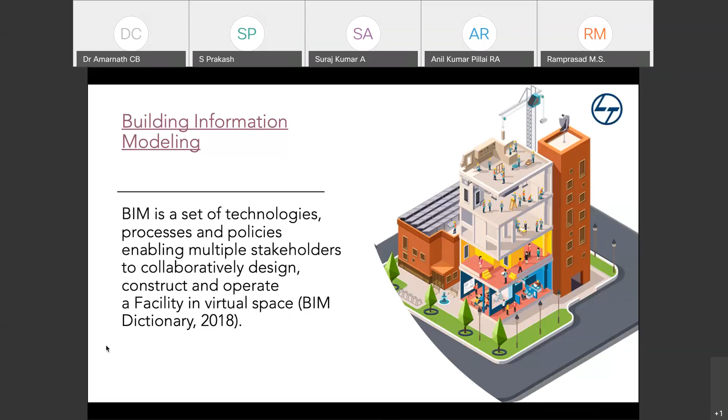So why BIM? We are saying that many countries are doing it. Obviously, they are doing it. They know the returns from that and what benefits different stakeholders can get. We in India, our AECO industry employs more than 35 million people and has the second highest inflow of foreign direct investments. It also contributes 11.1% of India's GDP. This is as per the survey of 2016. Okay, now there may be changes.

When you implement BIM in projects, it will firstly help you reduce the initial cost of construction and the life cycle cost. Because what is most important in projects is plan better and construct faster. But what happens in regular situations is plan faster and construct for a long time. So it may lead to delays.

When you have BIM kind of things, you have virtual models getting developed. You are doing a lot of simulations with respect to time planning, cost planning, different types of analysis, safety checks. Everything can be done so that you have a better understanding, even in terms of cost flow, what is required in the projects. It can also reduce the overall time by almost 50%, they say, but at least my understanding is 20 to 30% time can be easily saved when you plan it better and have visualization.

Like how you see in the aeronautical industry, mechanical industry, product development, they all develop the virtual model first. They do possible simulations before they manufacture or fabricate. I think this is most important for our AEC sector also. So that's the reason BIM comes into picture. BIM is nothing new. It's the same way how the aeronautic or other divisions follow. They have different terms used, but we use it as BIM.

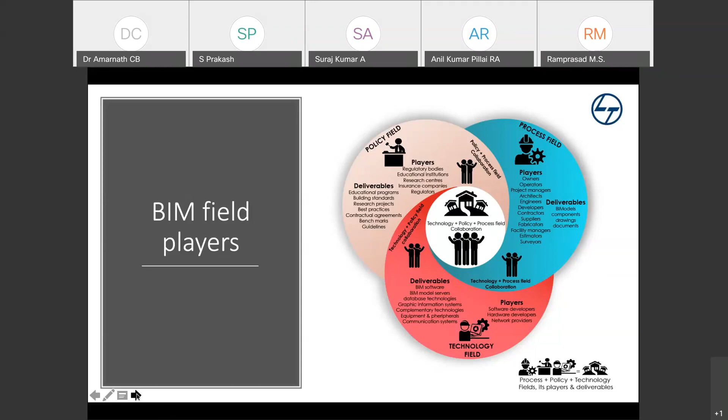Coming to our AECO organizations and their stakeholders - as I said, there are different organizations which come into picture when we are delivering a project. At least to name some of them, you have a design or engineering organization, a building organization, subcontractors, outside organizations, and owner organizations.

Within design, you may have architect, structure, plumbing, electrical, HVAC, or interiors people, and so on. Within the building organization, you have planning engineers, estimators, quantity surveyors, contractors, construction managers, and so on.

Subcontractors may include fabricators and manufacturers. Outside organizations are like government agencies.

I think you have to speak into your mic. Anyone here on the session? Can all of you mute your mics, please? I think all of them have unmuted their mics. Yeah.

Okay, thank you. So next is the owner organization - facility users, owners, or facility managers.

As I do this, I can still hear the voice in the background. Suraj, I think your mic is unmuted. Suraj? Yeah, I'm sorry, I'll mute it.

Thank you, thank you. So all of these people at the project level have something to do with BIM. It's not like the contractor says this is something the design team needs to do, or the owner says I have nothing to do, design has done it. It's not like that.

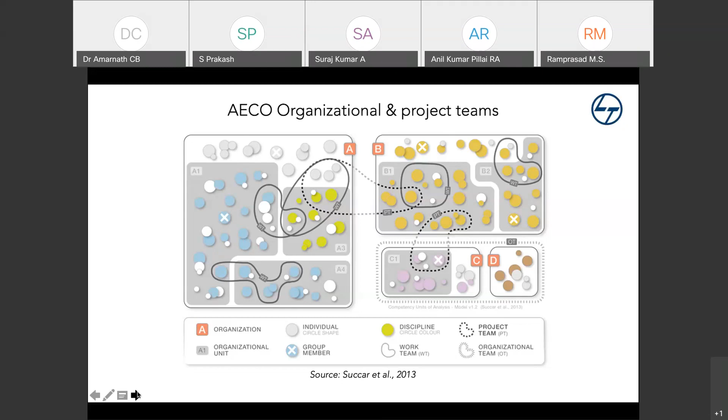The next one you would have heard is the term common data environment. The term itself says it's a common environment for data management. What data? It's facility data—it may be building, infrastructure, or city data. So where do you get this common data?

We call it a cloud platform. That doesn't mean it's just 'a cloud'—as you all know, there are cloud services provided by several agencies, including Amazon and so on, where dedicated servers and networks are set up, and you are able to use that space or capacity to do your activities, developing a model, using it, sharing it, or whatever.

So day in, day out, this cloud platform has become common for all of us. It may be Gmail or any email—that's cloud based, because you are not storing any data on your computer. Or it may be Dropbox or any kind of application these days, they're all cloud based.

The same way, cloud solutions are used for our AEC sector, where you can install this software, or software as a service can also be provided, where you can access the software, log in, and design the model, and other people can also open the same login and see the progress. During construction, any changes that happen can be updated back to the model in the same cloud, so other people get an update. Previously, in a traditional approach, it was a little difficult for people to coordinate, but here is a single platform where different people come together.

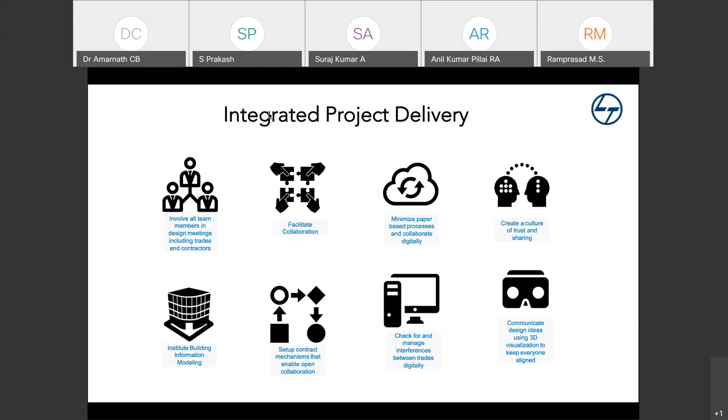So these are the 8 important characteristics for IPD.

Looking into the global trends in BIM, what's happening globally is that, as I said, more than 80 to 100 countries are working on BIM because of the kind of benefits it can bring in. BIM doesn't come in directly by itself; there is a set of researchers working globally from different research centers to mature these BIM technologies, policies, and standardized workflows. So a lot of research is happening.

If you want to go into detail and understand what's happening globally in terms of BIM, just go to Google and search BIM research — you'll find my article, published in 2016, which was one of the top 10 research outputs for 2016 on BIM globally. We researched what's happening in 70-plus countries by exploring research papers from 65 countries to get a better understanding.

Different countries have different research capabilities. Some countries, like the UK and the Nordic region and Scotland, are more focused on policies and development of BIM guidelines and so on. In fact, BIM standards have been developed nationally in almost 10 to 15 countries already, and ISO BIM guidelines have recently been launched as a series for implementation.

Some countries in the Nordic region or other regions are more focused on software development related to BIM. Most technology solution providers are from Nordic regions, the US, and similar areas. In the Gulf, countries are mainly focusing on implementing whatever technology and skilled people are available. They have good money, so they bring all these things onto one platform — they want to implement BIM, and they have good exploration on implementation.

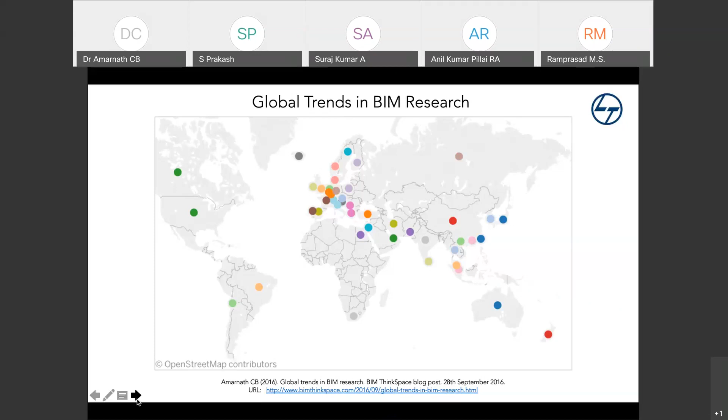So what's happening in the country now is many foreign companies pitch into the country. They take the projects by showing fancy things to the clients and the ministries, and then they subcontract it back to the Indian companies. This way it doesn't help. That's the reason we had a society to support and provide awareness on these things.

Next, about education. As we all know, BIM is not new in the market. BIM started already 3 decades ago. It has been seen as a new thing in the country, but it has been there in the market for the past 3 decades. Maybe this year it's almost complete, 3 decades.

So initially it started in some universities like Georgia Tech and Stanford. They initiated some interdisciplinary and distant collaborations. Then many universities realized that it's important, and they introduced it into their curriculums from 2003 to 2006 as a single course or intra-course collaborations.

Looking into this kind of progress, from 2006 to 2009 a number of colleges incorporated BIM into their existing curriculums. Meanwhile in India, universities are still thinking about introducing BIM in the curriculum. But one thing happening is they are introducing BIM software into the curriculum. Again, there are so many people with software capability, so teaching the same doesn't make sense.

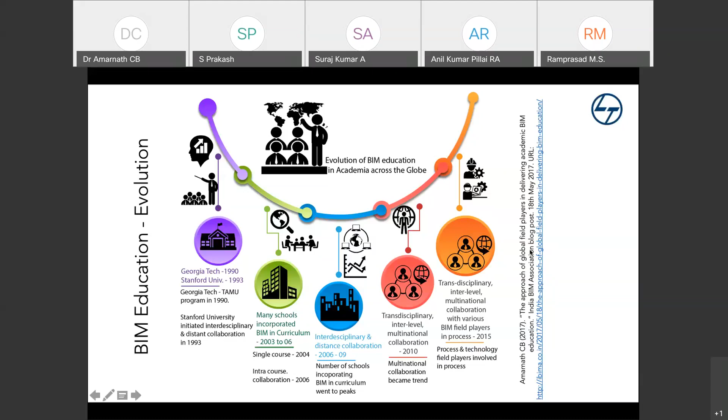This is the global trend in BIM education, where more than 20 to 25 countries already have BIM in the curriculum of civil, architecture, mechanical, construction management, real estate, and other divisions. In those curriculums it's already diffused, and they keep revising it every 1 year. But unfortunately in our country, the curriculum gets revised maybe once every 5 years, 3 years, 10 years, or maybe longer.

So then we will be very much outdated to work. It's one thing which is very important to consider: whatever education is delivered should help candidates focus on what's going to happen in the next decade. But our education system is helping them focus on what has happened in the previous decade. So there's a change required in the market on these lines also.

So, BIM adoption efforts worldwide from the public sector. This is about the mandates, since ministries and clients realize that BIM is benefiting them because they're able to visualize what's going to happen. They get clarity in terms of costing, clarity on how the building is built and managed, and they get better data for smart facility management during operation, where they can save a lot of money.

The main thing which matters is, after 10 years of facility construction, if you don't get the right data, how do you deal with it? When you have BIM, you have all the data set on one platform, so you'll be able to monitor the facilities easily. You don't need to hire more people to manage the facility, but you need a good platform set to manage the data.

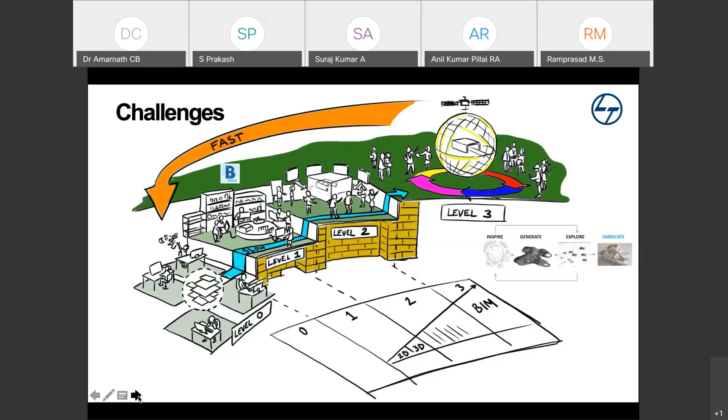Next, when it comes to BIM standards and guidelines, there are different ones. Initially, when BIM started in the 1990s and then 2000 onwards, some national standards began. That was a situation where a lot of national standards developed - every country wanted to have its own standards for BIM implementation. That's how USA has some agencies with their own standards, along with UK, Singapore, Finland, Australia, Brazil, Norway, Spain, Taiwan, Hong Kong, China, New Zealand, and many more countries.

In fact, these are all national standards which are more required for level 2 implementation. For level 3, you need ISO, which is a global standard. Unfortunately, for level 2, we don't have national standards.

What happens with the Indian market is we combine different standards from other countries and make a mixture, so we don't understand what's happening, and then we use those standards.

I want to add two more: 19650-3 and 5, recently launched, this month and the previous month. And there are a few others based on different implementation requirements. These are some ISO guidelines for BIM under development that may be launched soon, maybe this year or next. As I said, level 3 BIM standards needs another 3-4 years to be developed.

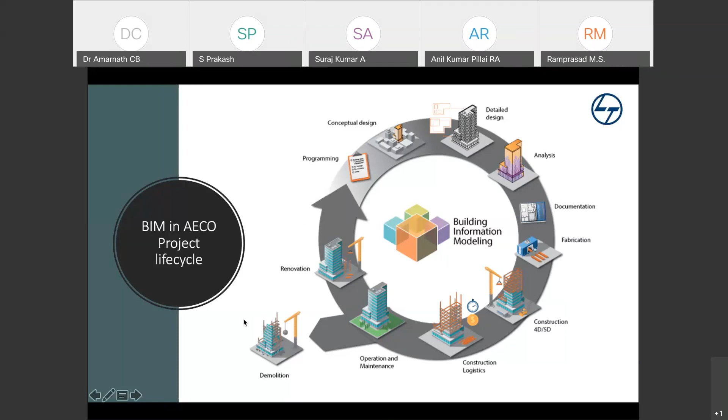The client may say they need site analysis done with BIM, or a BIM model developed with the process, 2D documentation generated from the model, fabrication done with the model, or use it for time planning. The client needs to make a decision sitting with a consultant, saying these are the BIM uses I want to implement for my project. Based on that, further RFPs will be prepared, and then the project execution plan can be prepared based on that requirement.

When someone asks me what is the cost involved in implementation of BIM in a project, well, it all depends on what level of BIM you need in the project, what benefits you want to implement or take return on investment on, what is the size of the project, what technologies are involved, and what kind of people to be procured. Everything counts if you want to decide the cost of BIM implementation. It's not something a guesswork.

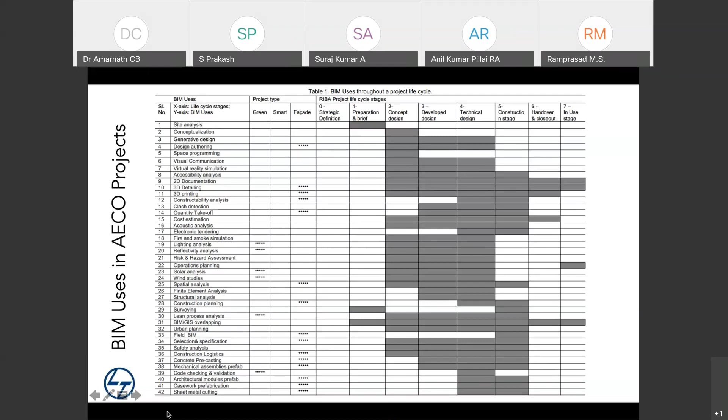Here you can see 42 menu items, and in the next screen you can see 43 to 74. That means if you want to implement BIM in a project, you need to select which of these items to activate. For any item activated, you may need some set of softwares, a set of people to work on that, and a set of deliverables coming out of that. All the uses may not be applicable for all types of projects.

Coming to BIM model details. When we say BIM model, we all know it's good for visualization. But how detailed is this model? Will you get the detailed model from day one of design? It keeps on maturing. If you can see here, different color codes in the columns: strategic definition, preparation, concept, develop, technical, construction, handover, and maintenance. So the BIM model also matures based on the stages of the project.

We call it level of detail or level of development, LOD. Initially, strategic definition is more of a client and consultant discussion about what he needs and what can be delivered. Preparation brief is where they start doing the site data check and updates, where site data becomes available. This is called LOD 100, where you have a planning model with site data available, which may include pipelines, underground network, surrounding utilities, and surrounding facilities.

Concept design is where you start making a conceptual model of your facility, which may include orientation, shape, and basic information. This is also LOD 100. Then comes developed design, building on the concept design where mainly architecture comes in, along with structure team and other people, who add further data into the model, like number of floors, number of spaces available, and what each space will be utilized for.

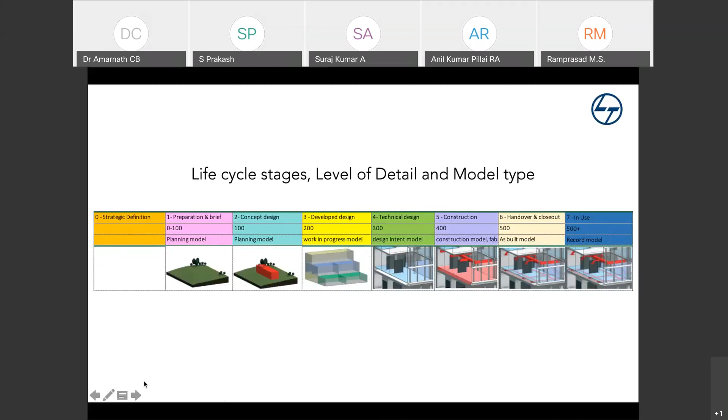When I talk about different hotel menu items, as I said, different dishes - each of these BIM uses, 74 items, has been categorized into different life cycle phases, and we have 8 categories for that. I won't go deeper into that because we have very limited time, another half an hour, but I will give you an overview. Like if you go to a hotel, you know the menu items - South Indian means you have idli, vada, dosa, different items like this. The same way in our BIM menu, you'll have different items. You may need to select which one you need, and based on each selection, you will know what is the kind of cost incurred for that implementation in the project.

So the first one is existing condition modeling. When I say existing condition modeling, it's nothing but collecting data from the site, any site related data, any existing facility already there that you want to renovate - that data can be captured.

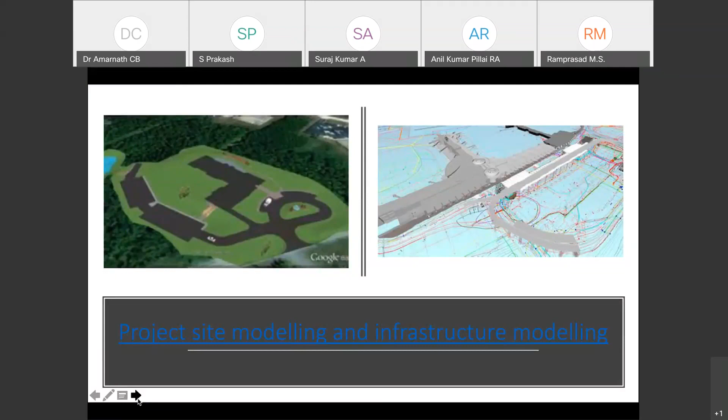That data can be captured with existing technologies and equipment. Next, within that you will be collecting the ground surface model of the project. You'll be developing the ground surface model and any occupying or relevant structures and utilities affecting the project. You will have a surveying and BIM team involved, and you may be using drones, laser scanners, robotic stations, photogrammetry, these kind of things. And you'll develop a BIM model with LOD 200 to 300. This happens in the initial stage of the projects, and you may be using softwares like Revit, Bentley, Context Capture, Recap, SketchUp, these kind of things.

The next one is surrounding site modeling. Now you collected the site data, and now you want to collect the surrounding site data, surrounding that site. Maybe what kind of infrastructures are available, facilities available surrounding that, what kind of roadways available, what kind of public transport available. All this data can be captured. We call it more of urban level data capture.

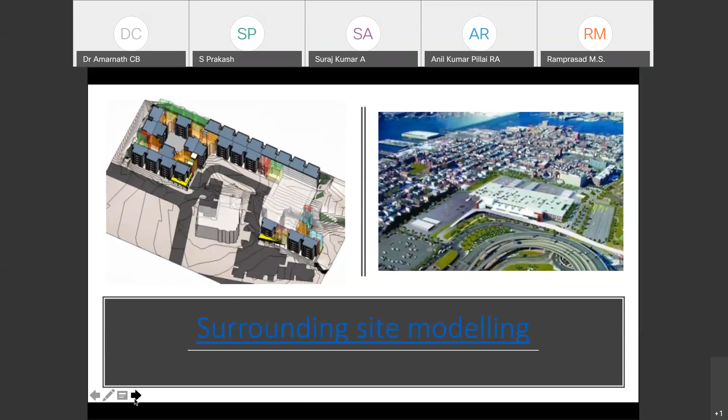For better planning, this includes area, buildings, and infrastructure adjacent to the project site necessary for project analysis, review, and decision support. You have the same surveying, design, and BIM team using drones and laser scanners, and LOD 100 to 200 is required. You will have similar some kind of softwares mentioned here, you can see the Revit, context capture, and so on.

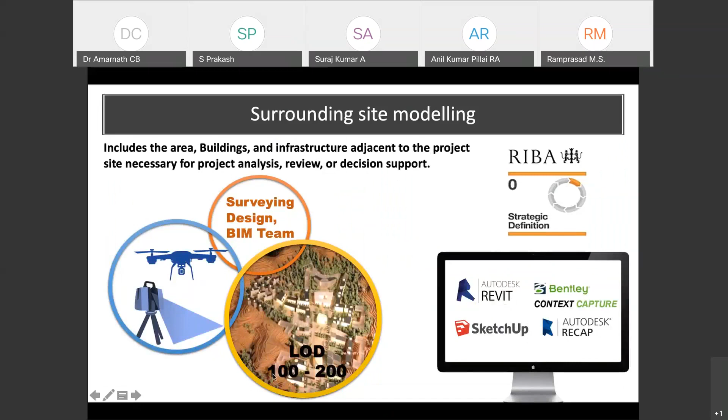Next one is existing condition laser scanning. For example, there is some existing facility you want to renovate, or you want to add on some other new facility to that, but you want to do retrofit also maybe. Then you will use laser scanners. You will capture the point clouds from that, and then you will convert the model. This will also allow you to find what are the defects that need to be fixed, and so on. So here you may be using 3D laser scanning that produces dimension-accurate and detailed 3D point clouds for existing facilities and assets. You have surveying, design, and BIM team, and similar kind of software is available for doing this activity.

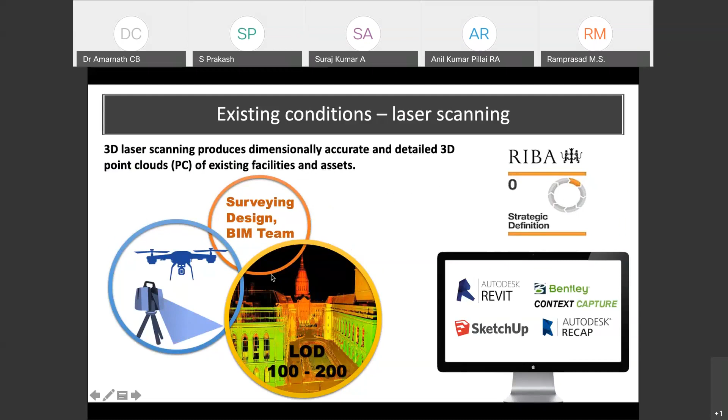Next, existing conditions interior modeling. Most of the infrastructure projects or anything, we have interior arrangements, no? Maybe seating arrangements or interior design that may be changed every 5 years or 3 years or 10 years once in many of the IT companies. But how do you change? Before you show to a client, this is how it looks like before, and this is how it looks like later. It will be very difficult to define that without having a clarity. So what you do is, it will be very difficult to take the measurements within the facility. You go into the facility interiors, go take the measurements. That's a very tedious process.

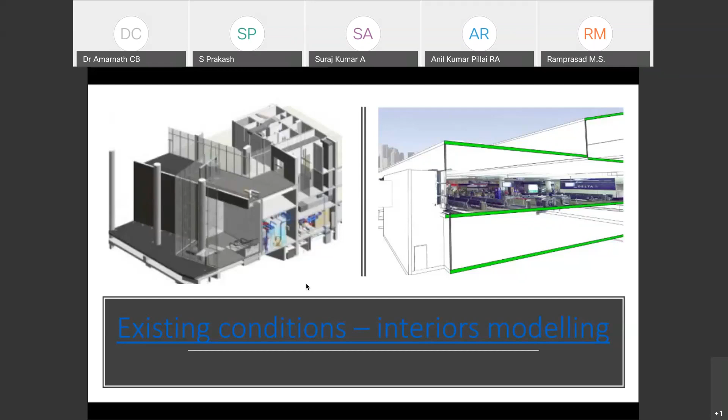But you have laser scanners wherein you can walk inside the facility, and it collects the point clouds. You can use the same point cloud for easy measurements, and you can also get a clear understanding on what kind of interiors are there. Then you can reconsider the new design and you can showcase to the client for better planning. So here a spatially accurate model of existing spaces, building systems, components, and equipment will be collected with an LOD 300. You can have a better walkthrough of the facility. You can do better surveying, design, and BIM team will be involved here, and some set of softwares mentioned here will be utilized.

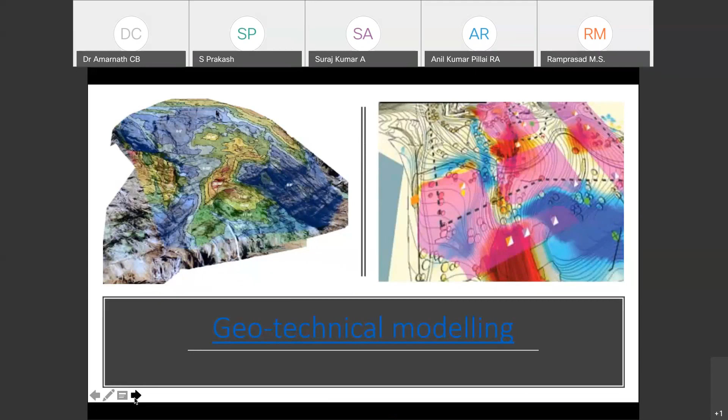So this is for geotechnical modeling. Whoever is geotechnical related people, you also have a role in field. You can collect the geotechnical data from the BIM process, and it will help you for better visualize dimensionally accurate models of geotechnical analysis. Reports can be generated, which may be required for the project scope and so on. So here LOD 100 to 200 can be generated. You have a geotechnical surveying and BIM team involved, and you may be using softwares like Civil 3D, Recap, Context Capture, Revit, and so on. This all happens in the initial stage of the projects, level 0.

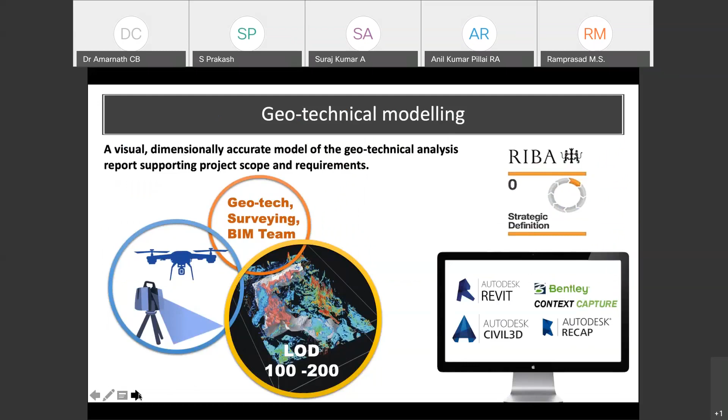You have surveying, design, and BIM teams coming into the picture. Softwares like Navisworks, Recap, Context Capture, and Revit can be utilized. So that's the first category of menu.

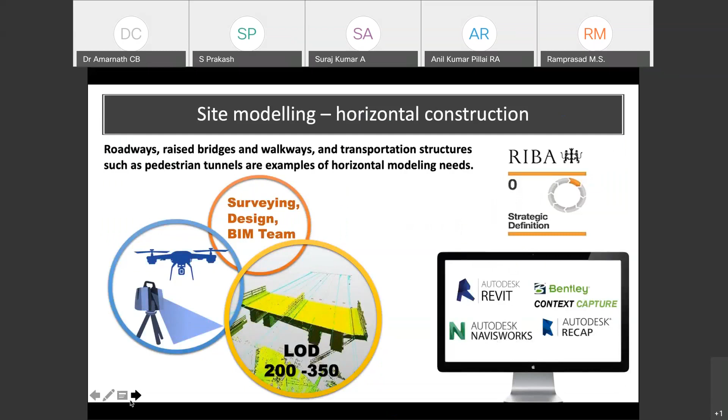Okay, this is the second category. Once you have the data of your facility of the project site, next what you do is you want to plan your facility. So you need to develop the model that we call the design and building system model.

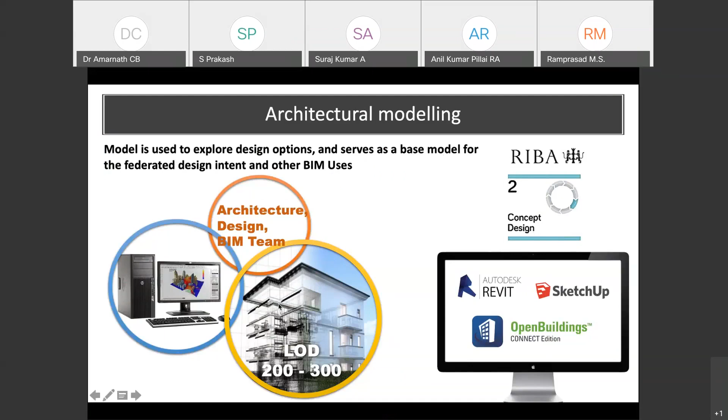There are plenty of softwares. Next is space, accessibility, and circulation requirements modeling. When you have a particular facility, you want to know which spaces should come in which locations. You need to do better planning for that, so BIM software solutions also benefit you there - modeling of space, circulation areas, accessibility usage, and accessibility standards, because some spaces may be publicly accessible while some may be restricted.

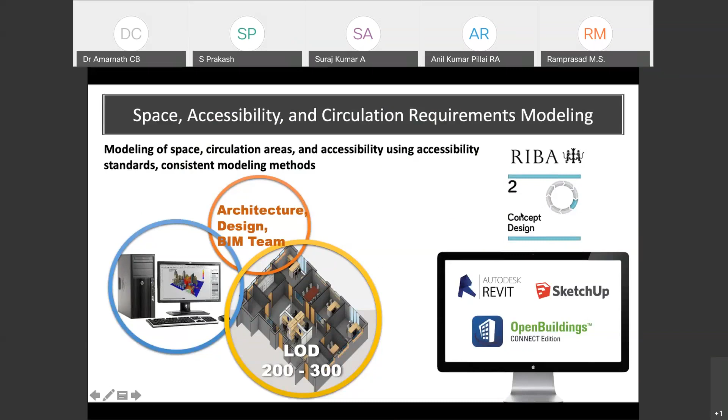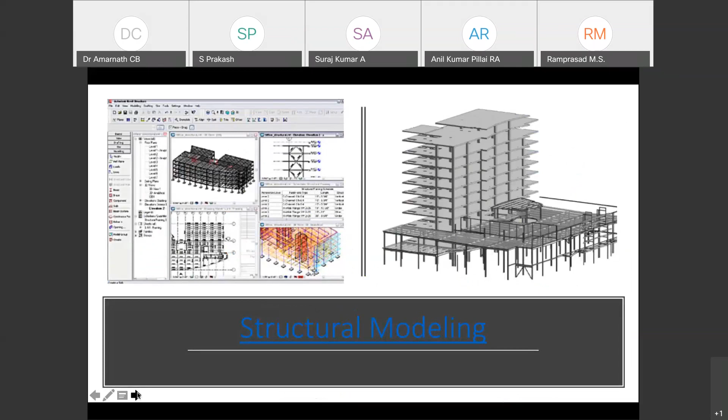So this also happens during the concept design phase. Then the structural modeling - this is where the structural engineers come into picture. Once they have the architecture model, the structural team also works on developing the structural BIM model using these BIM software solutions. So the design team, structural team, and BIM team will be involved.

The next one is heating, ventilation, and air conditioning, which is more of a mechanical analysis system. Trust me, BIM plays a very major role in this. Can you imagine a facility of this category being built without models, with fabrication done as per measurements? It becomes very tedious, because first of all, to fabricate you need exact measurements. Second, if you have BIM models, you can directly link with CNC machines and develop fabrications very quickly, with minimal human interference.

Assembling also becomes much easier because you can plan: these are the items I need for the site on this day. You can procure that on site whenever required, rather than bringing everything and dumping it on the site at once. So this helps MEP people in a big way.

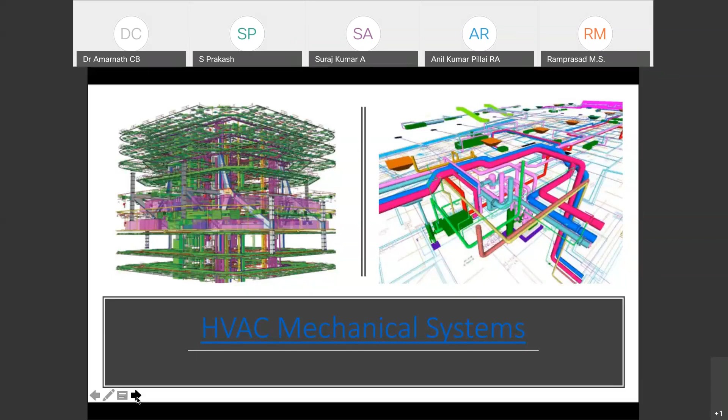So a model of the MEP system is developed for decision support and analysis, made ready for detailing and fabrication. When it comes to heating, ventilation, and air conditioning, you have several items coming in, and you may need to do a lot of coordination work. Use softwares like Solibri, Navisworks, and so on. This happens during developed design, and the BIM model will be a little more detailed here, LOD 200 to 400, because you need to send it for fabrication.

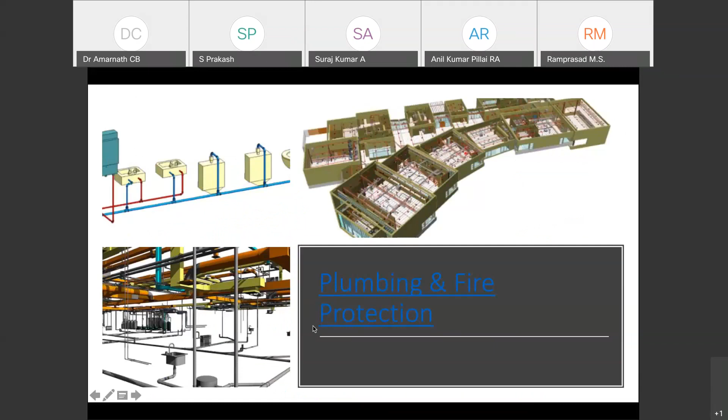You can also go for the structural team, LOD 350, for fabrication. Next is plumbing and fire protection - these models can also be generated and procured easily. You have a MEP team, facility maintenance team, and BIM team involved. The detail level here is much larger, 200 to 500, until handover, whatever changes happen. Because when it comes to plumbing and fire protection, this is the most important thing the maintenance team utilizes during the operation phase. So whatever has been developed, designed, installed, and whatever changes occurred during installation, everything needs to be updated back into the model when delivering it to the maintenance team.

Next is electrical alarm systems. You can also model the electrical alarm systems, developing the primary components of electrical lighting alarm systems, building automation systems, controls, and so on. Here at LOD 200 to 300, you have the MEP, BIM team, and facility maintenance team coming in, and this happens during the developed design phase.

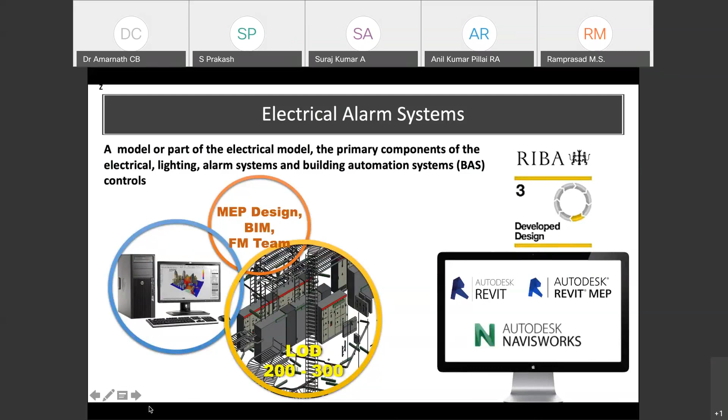Then the interiors. Interiors are not left behind; they are very much easy to use with this model. They can easily look into the models and have walkthroughs. The client can get impressed very easily because you can make them walk through using virtual reality, augmented reality, and all these things, giving a better experience to the client and other agencies.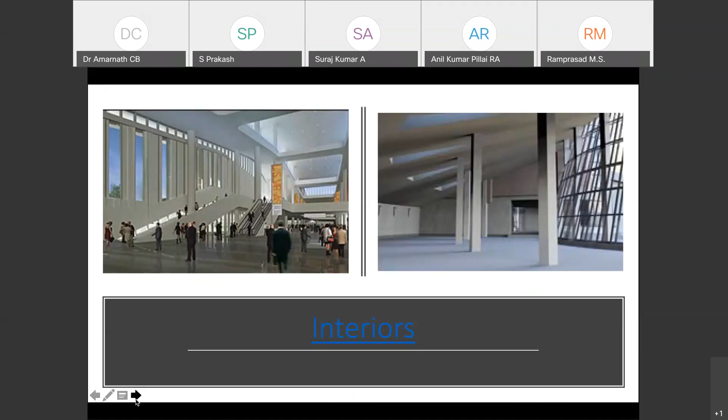This is where modeling of interior design options, material finish systems, signage, and daylighting happens. You may use software like Revit, 3ds Max, SketchUp, and Lumion for better visualization.

So tenant build out is when you have big facilities, and for your tenants you also need to fix the interiors. For example, imagine an airport with different shopping complexes, like a McDonald's or Coffee Day. Obviously those people cannot come after you start the airport and then do the interiors; everything needs to be planned prior.

You need to know who is going to take this facility, and you need to also get the interiors done for them before delivering the project. That's nothing but tenant build out. All these things should be considered, and at the time you're delivering the project, A to Z will be delivered.

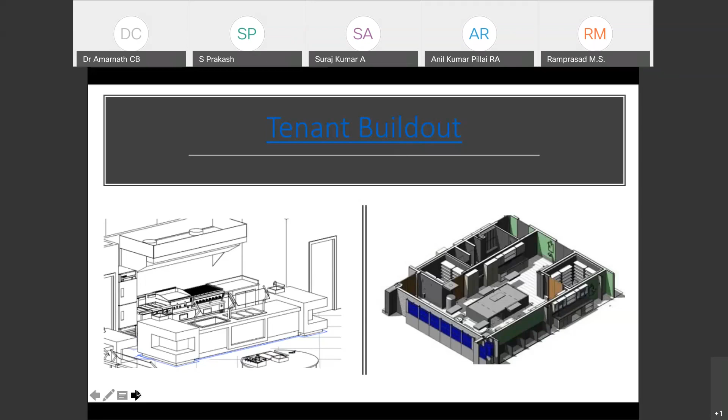The next category, the third menu, is about once you develop the model. First you collected the project data and site data, next you developed the model related to different disciplines, and next you use the model for different types of analysis and reporting.

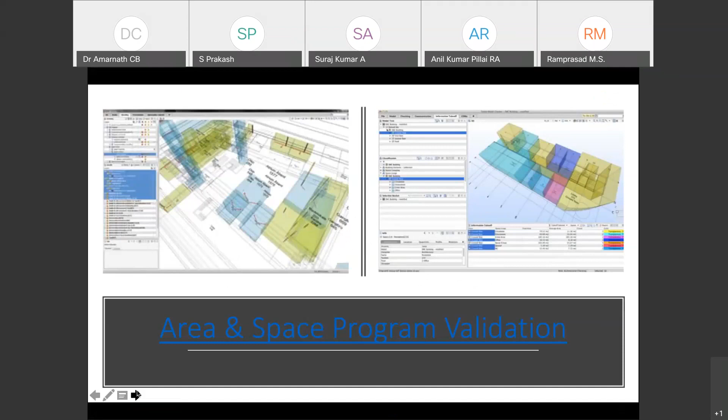So you can use it for area and space program validations, because you need to know how much space is required for each space, and the area and everything needs to be validated.

You can use the BIM file, specifically spaces and bounding elements including floors and stories, analyzed with model checking software. One good one is Solibri, which will help you well in doing these coordination checks.

The next is design options. When your client is there, you cannot show one design and say go with it; obviously they will expect you to show 2 to 3 alternative design options. With the BIM model, you can plan different possible alternative options at a conceptual level, then show the benefits and drawbacks of each design so the client can make a quicker decision on implementing.

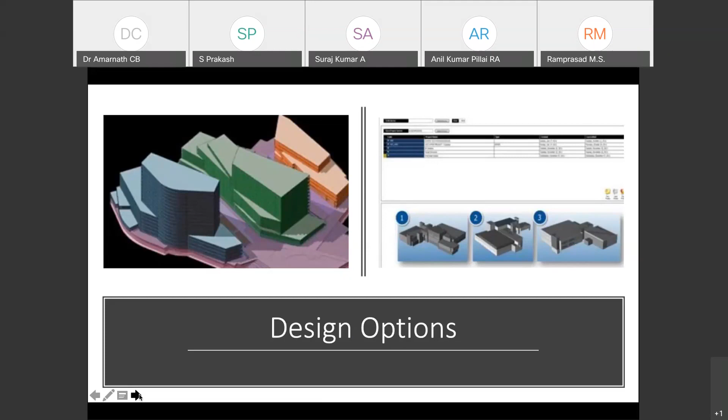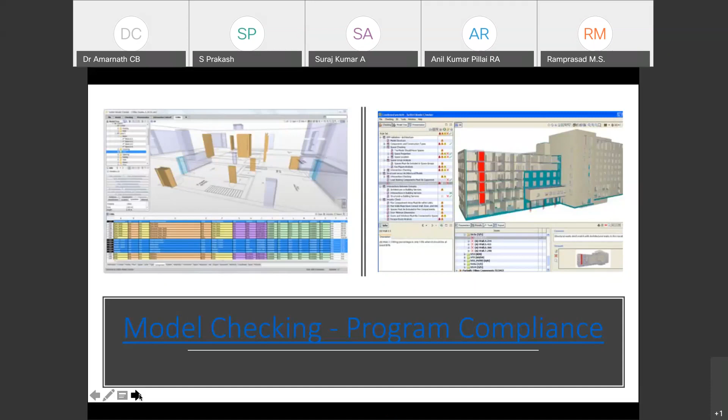The next one is model checking for program compliance. This is a very important BIM use in the project. When you develop BIM models or CAD drawings, if you go to the site and start implementing and there is any overlap between different disciplines, rework occurs. But when you have the BIM models, you can bring them all together and do interference checks, avoiding these clashes before going to the site, saving a lot of money and time, improving quality, and making the client much more satisfied.

So model checking is a rule-based activity that automates model reviews. Whatever software you use, like Solibri, you can set rule sets saying this is the minimum distance between these two items and this is the space required. Every rule set can be set and it will identify and flag the clashes. Then you can have a coordination meeting with people from different disciplines and resolve them. This happens during developed design, technical design, and also during the construction phase. That's nothing but clash avoidance and detection.

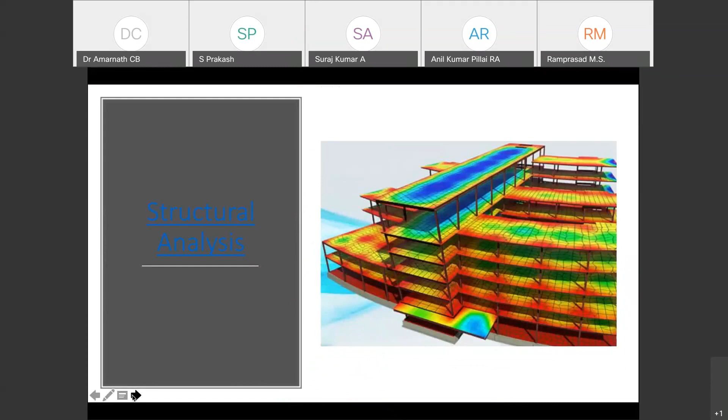So next one is structural analysis. Previously you saw structural modeling; now once you have the model of a structure, you can do different types of analysis. Previously you used to use STAAD and similar tools, which are all 2D based. Now you have structural analysis software for BIM itself - you just use the model and can do better structural analysis with detailed information. The only thing is, all the previous software you used in the 2D era gets outdated, and you cannot use that kind of technology alongside this implementation.

You cannot say some people use the model and some people go with 2D - that's no use at all. Better not implement BIM in that situation. If you want to go with BIM, go with complete BIM so you get the return on investment. If you want to go with half BIM, better don't go with it at all. Whenever you feel ready to go, then you can start that.

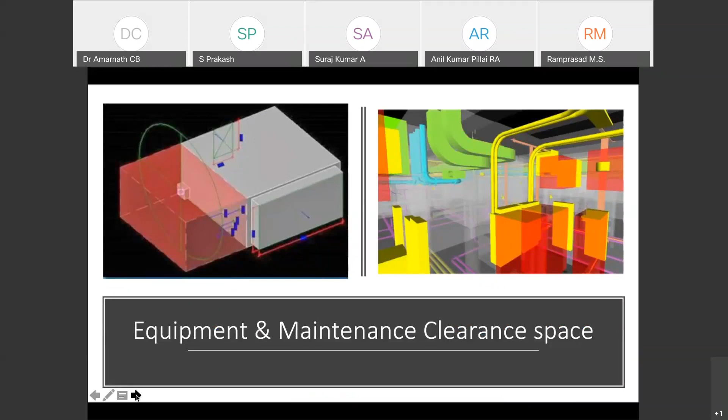BIM can also help you find equipment and maintenance clearance space - whatever space you need around each equipment as clearance for its operation - and that can also be checked well in the BIM models. So the modeling covers major equipment and elements required, and defines access and maintenance spaces. Here, LOD 400 will be required, and you may use software like the Revit Suite and other applications including Navisworks.

Previously, to do estimation we used to imagine the quantities and put a rough estimate. That used to deviate a lot from what was actually delivered, and the client would become very unhappy when comparing the planned budget with the actual cost.

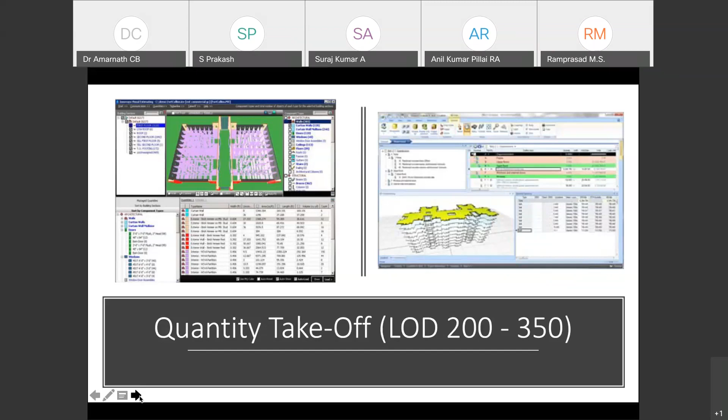But when it comes to BIM, you have the model with all the materials exactly defined. It's simple: you extract the quantities from the model and multiply with the existing schedule of rates. Your planned cost will not deviate more than 5%, so the client is happy, fund flow is smoother, and there are fewer litigations. Once the BIM model is available, you can extract quantities easily and very fast.

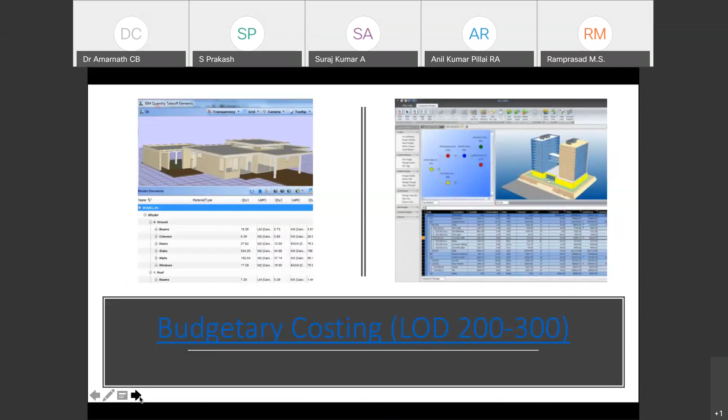With the same quantities, you can do cost estimations easily. Every time there's a design change, it used to be tedious to redo the cost estimation, but with the BIM model it's very simple. Whatever changes happen, you update the model, extract the quantities again, and multiply with the schedule of rates. Within a day or two, you get the quantities and estimations. It's used for budgetary costing.

The next category is about sustainability, LEED, and energy. Many times we speak about smart and sustainable cities, green buildings, and green infrastructure, going with LEED, IGBC, TERI, GRIHA, or other certifications. Those related benefits are also available in BIM.

Once you have the BIM model, you can use it for energy modeling, sun studies, and daylighting analysis. The BIM model is analyzed to improve daylighting in design, understand sun shading needs, and balance daylighting with artificial lighting. There are softwares like Green Building Studio, EcoTect, and so on.

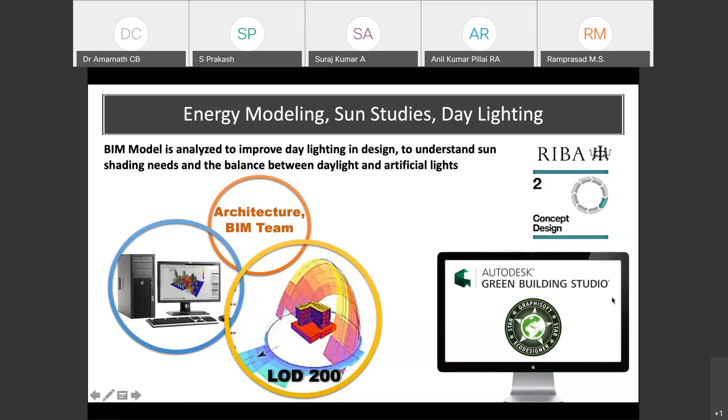The next one is existing building rapid energy modeling. Even when you don't have enough data for your facility, you can still do energy analysis. There are techniques and software solutions that help, like Sefaira, Revit, and so on, allowing you to do energy analysis with limited data.

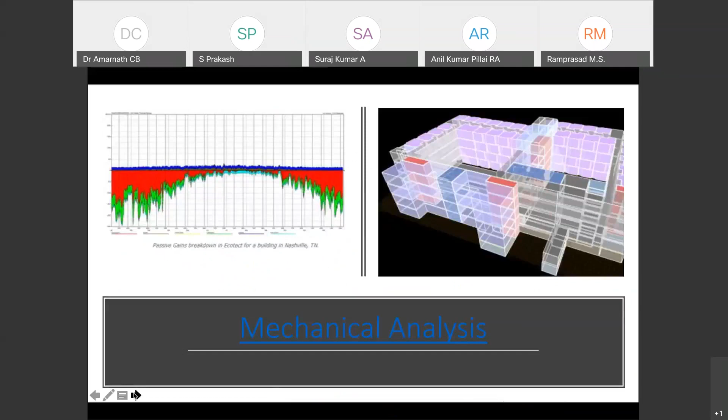Next is mechanical analysis. You can do virtual testing and balancing of the design model to support sustainable building system design analysis, calculate native heating and cooling analysis, and so on. Here the BIM model will be like LOD 300, with MEP design and the BIM team coming in. This happens during the developed design phase and further.

Next is green building certification. It would be wrong to say LEED certification because it's broader than that; we're taking LEED, a US-based certification, as an example. Similar analysis can be done with other certifications, but LEED agencies and BIM are now coordinated very well. With other green certifications you cannot automate BIM as fast, but with LEED some level of automation has come so that LEED consultants can easily use the model to give better suggestions to clients about what rating or certification they will get.

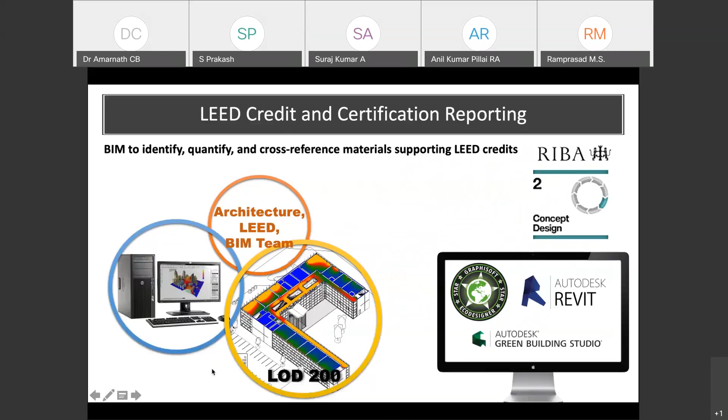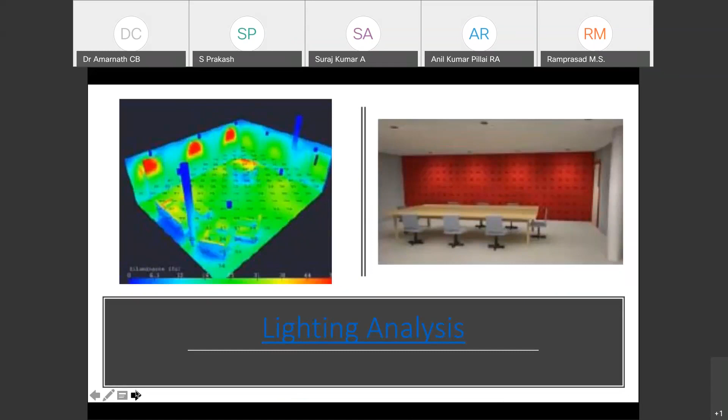Next, lighting analysis can be done with BIM. You can study different lighting scenarios, where fixtures need to come, and everything can be analyzed and assembled as per requirements. This also helps achieve a better green building outcome.

Next is system analysis. Again, BIM is used to capture the building geometry and characteristics needed to conduct aspects of energy performance analysis and support that process.

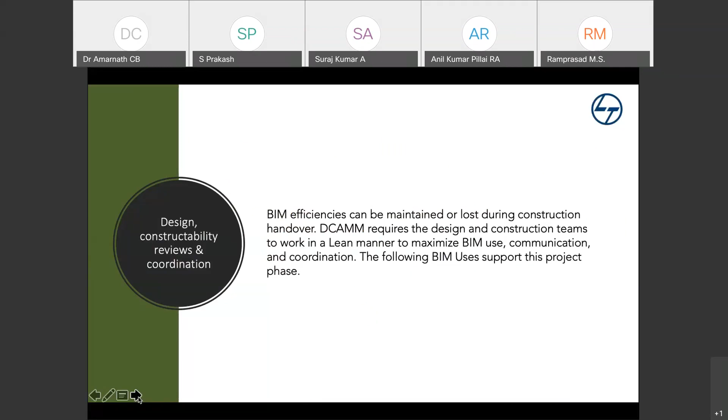The next category is about how you use this BIM model for design, constructability reviews, and coordination. Here is where the construction team comes into picture. Whatever we spoke before was more on engineering and design, but now it's more on the construction phase. Once the BIM model is developed, it may be used for different coordination meetings on the project site.

You may have projectors or a big screen setup so people can visualize things better and have better coordination, rather than wasting time when there's no visualization because different people imagine things differently. But when you have the model in place, everyone is on one platform thinking about what is actually there in the model.

This will help you make better decisions among the teams. Once you have the model, you can develop digital details and mockups which can be used for fabrication and so on.

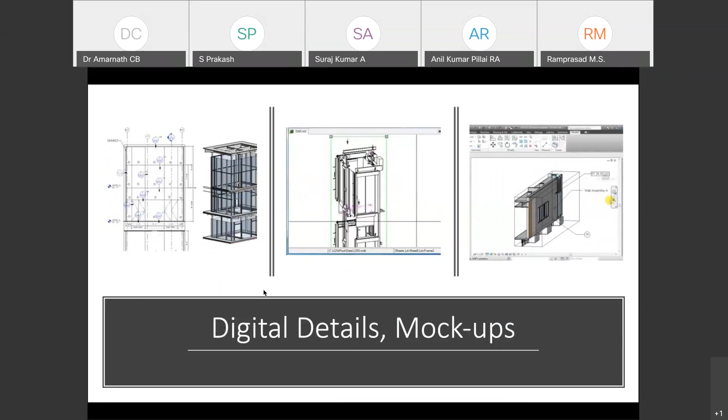This is about scheduling, 4D modeling and logistics. Once you have the BIM model, you can link it with the timeline for better time planning on site. You want to know what equipment is moving on site, what crane movements happen, what procurements happen, and what travel paths people take, so you can do better time, cost, safety, risk, and hazard assessments, and procurements.

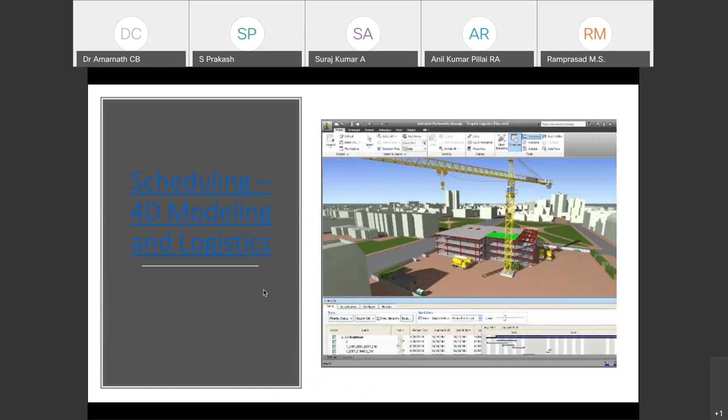The construction coordination model supports look-ahead planning, construction phasing, construction material movement, labor sequencing, and site planning. This involves architecture, engineering and construction managers and the BIM team. The BIM model is at LOD 300, mainly during the construction phase, using software like Synchro, Vico, and other tools.

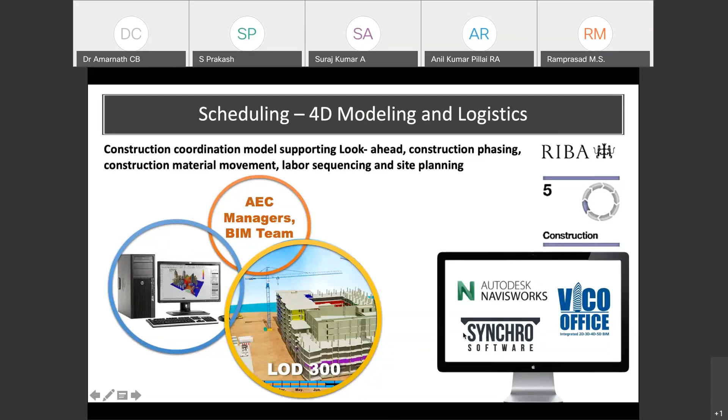In-field construction layout: this is the guy on the left sitting with a total robotic station, where he has loaded the BIM model and point cloud and is able to guide site assembly with the point cloud, indicating where each product needs to be assembled. This also helps him capture the positioning of each assembly and put it back into the model, because he needs to guide any site construction changes back into the model.

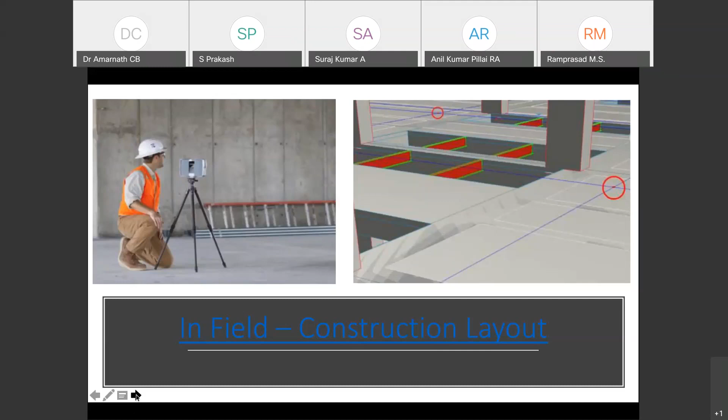This is again LOD 300. Construction managers do the key work here with the BIM team, starting in the technical design phase and moving into the construction phase, with subcontractors also involved.

Then there's laser scanning for the construction phase. Many times you want to capture as-built data, so you do the laser scan, get the point cloud and real information. You can also use it for measurements and as digital twin model data.

You can also use it for progress monitoring. Every three or six months, you need to know if you're behind or ahead of schedule. You do the laser scan, overlap it on previous data, and see how much progress has been made. If behind, you need to fast-track the process with extra resources.

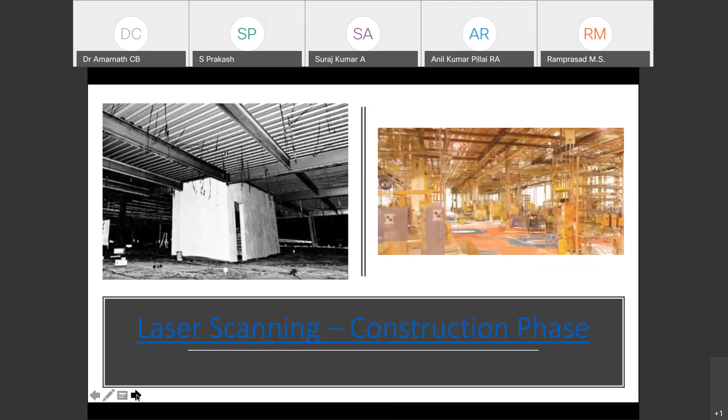3D laser scanning performed during construction captures as-built work, aiding operation teams in facility management. This uses a BIM model at LOD 500, with construction managers and the BIM team involved. Scanners like Faro or other laser scanners and Karta are used, along with software like Context Capture to convert point clouds to models, as well as Revit-compatible software. This usually happens during the construction phase for different purposes.

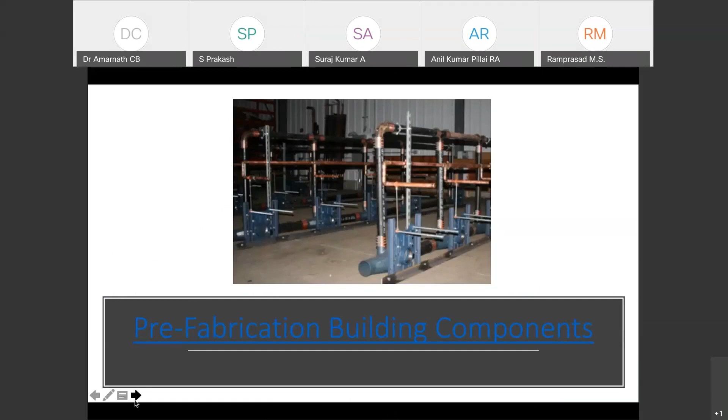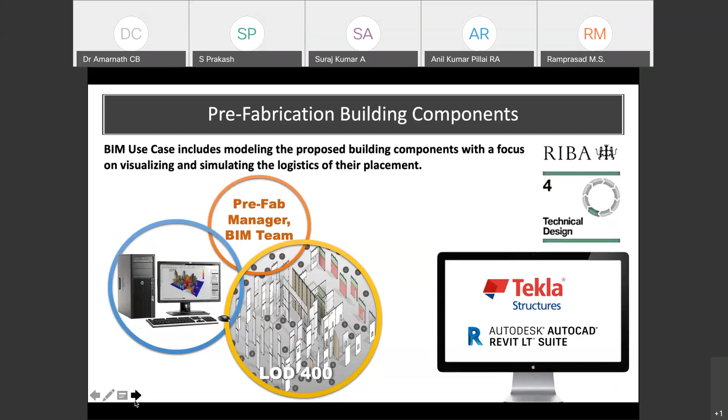This is for prefabrication of building components. Once you have the BIM model at LOD 400, you can link the same data with CNC machines to fabricate materials and send them to the site as needed, making procurement and assembly easier. Prefabrication managers and the BIM team are involved here, with the model at LOD 400, using software like Tekla Structures and others.

The next category is documentation, drawings, and specifications. Once you have the model, you use it for construction, analysis, and everything else. Now you can extract drawings from the same model, so construction drawing production can be done directly, and every revision can be easily shared with the site people.

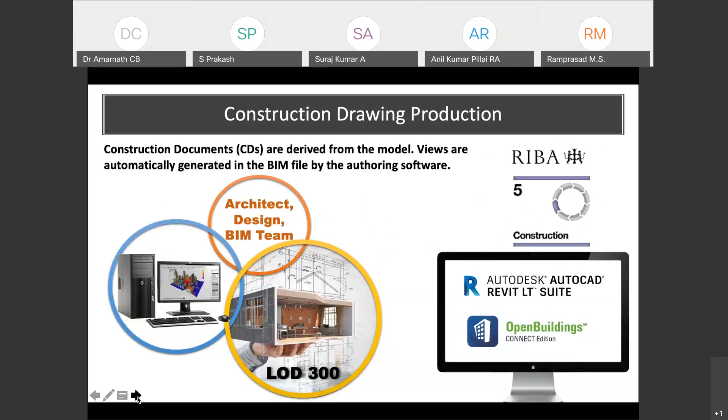Next, you can use it for shop drawing coordination. Here you have architecture, design, and the BIM team involved, with the BIM model at LOD 300, happening during the construction phase of a project.

And next comes the as-built models. This is where people call it a digital twin. When I say digital twin, this may be a common fancy word many people are using nowadays to say, okay, I'm delivering a digital twin. Digital twin is nothing special, it's nothing but a virtual model. You have a virtual model, which is a replica of your actual facility that is built.

For example, I have planned something for the airport, and after construction there are some changes. That change I update back to the design model, whatever BIM model you have built. Any changes are updated, and until the final construction is handed over, all the changes have been updated. That becomes a virtual model of your real construction work. So we call the digital model and the real facility combination as a digital twin. We also call it an as-built model.

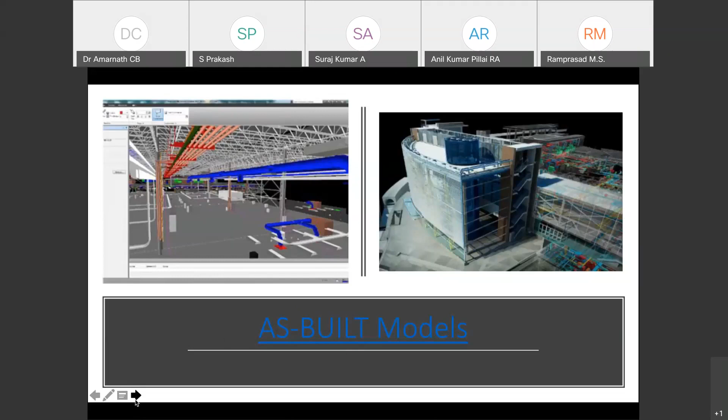Before we had a design model. Now whatever has been built, that is updated, so it becomes as-built. This is a key requirement during the handover phase for the clients and also for the operation team. Usually architecture, design, and facility maintenance teams are involved here to get as per what they need. And LOD 500 model is a must for this phase, and this can be utilized for the maintenance phase further.

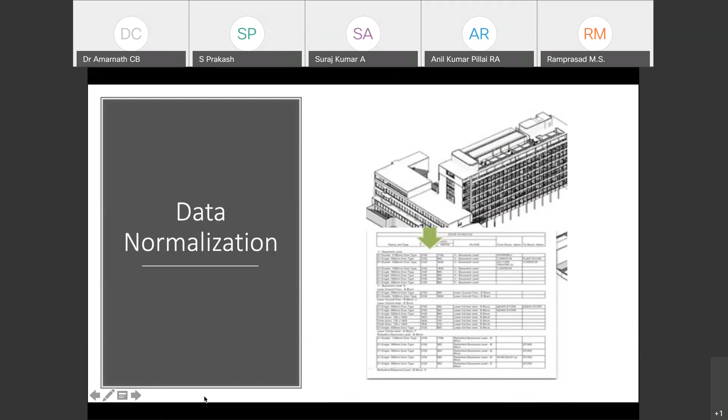Data normalization: because there are so many people involved in adding data into the model, it's important. For example, if 4 to 5 modelers are doing the architecture work, there may be 5 to 10 conference rooms. Someone names it a conference room, someone names it a meeting room, someone names it XYZ, some other name. But when you are going to use the model, you cannot have these different naming conventions. You need to normalize that - that is nothing but data normalization.

So you will have a data analyst and BIM team involved here. LOD 300 model is required here as a basic. You may be using some of the classification standards like OmniClass, UniClass. You may be using Microsoft SQL Server for the categorization, and Excel, and so on.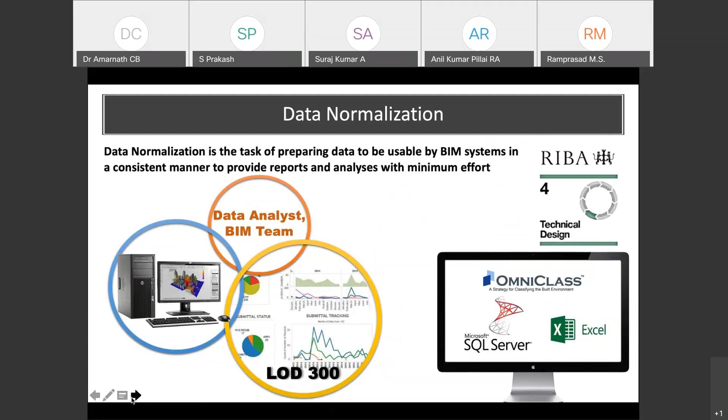Then as-built CAD drawings. Whatever CAD drawings you heard of before were construction CAD drawings. This is the CAD drawings after construction, the as-built model you get, and from that you extract the drawings. Why do you need these CAD drawings? This is required for the facility maintenance team for regular checkup and maintenance, and any kind of disasters and so on.

So this can be utilized, and architecture, design, FM teams, and BIM team are involved to give the inputs and relate the data. LOD 500 will be the model size, and this will be delivered during the handover and closeout phase of the project.

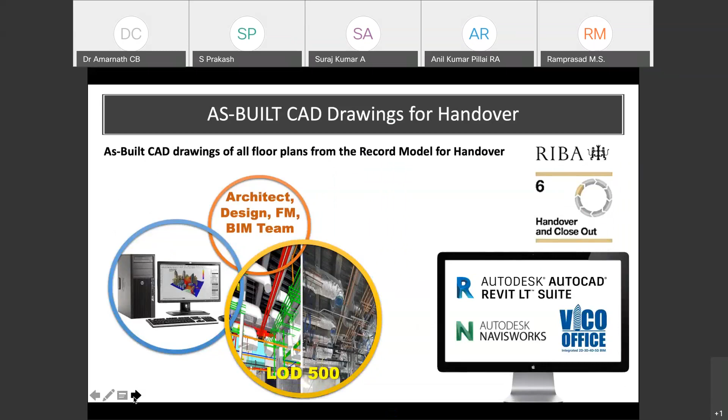The next is commissioning and handover. Once you have handed over, then you need to commission and use it for maintenance. So virtual handover - whatever changes, installation has been done, everything will be recorded and updated to the model. For example, some equipment gets installed. You may record how it has been installed, and you can link that data, model, video to the model, so that anyone who comes for maintenance can get clarity. Something like this, all data should be updated.

The next one is COBie. We call it construction operations building information exchange. This is very important for better facility maintenance, or for construction management, or design management. That's why you see design, build, and operate. The design team needs to hand over the data, whatever has been generated during the design phase, to the construction team as expected, so that they can use it.

The construction team needs to hand over the data, whatever is generated during the construction phase and design phase together, for the maintenance team. And the maintenance team needs to organize the data and use that link for smart facility management, so that the latest facility maintenance team can also benefit from it. How you deliver this data through Excel sheets based on each component is nothing but COBie.

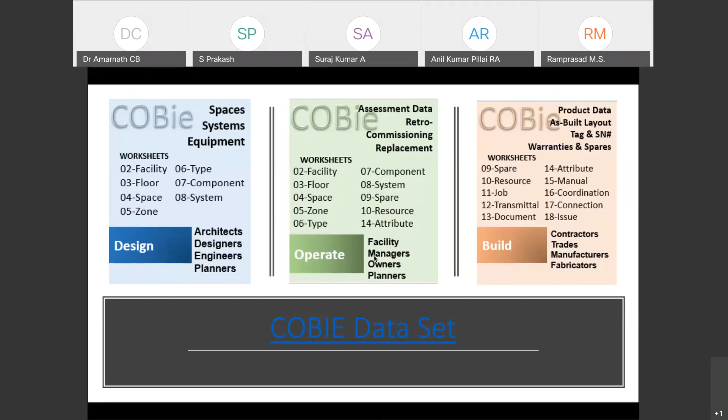The next is commissioning. You can also do better commissioning, which is a systematic process of verifying that all building systems perform interactively according to the design and the owner's operational needs.

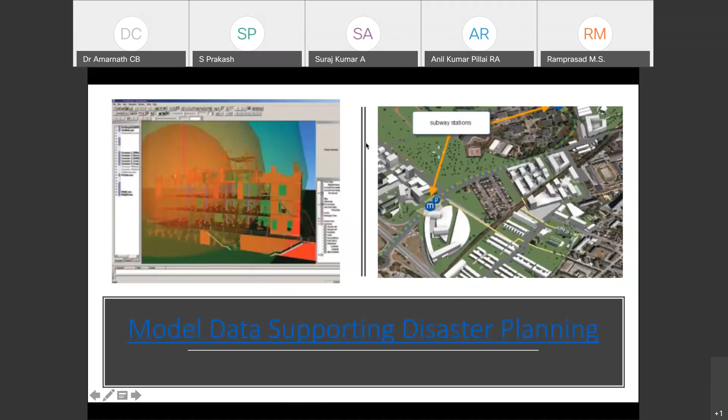The next is model data that can support disaster planning. You may know there may be several kinds of natural disasters that may come, but you may need to do better planning for that. So you can do possible simulations using BIM software and so on. So you have a design and BIM team, LOD 300 models, and so on. Next is model for maintenance and maintenance training.

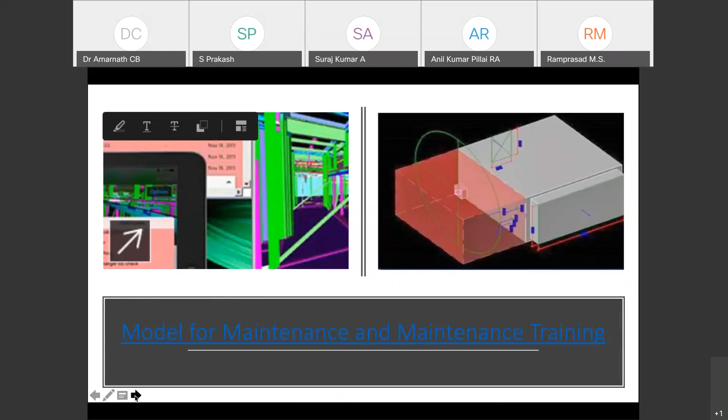There is a maintenance team which is coming for operation phase, but you also need to train them how they can manage this facility. For that, the training instructions, the model, video lectures, everything can be prepared and linked to the model, so that the training team can utilize it for better planning for operations.

The next is facilities and data integration. This is where smart facilities come in. So you are using it for assessment method models, where BIM may be used in the field for efficient data collection, for what's happening on the site, what kind of sustainability checks are happening, green building analysis, what kind of energy utilization, heat and cooling, everything can be tracked.

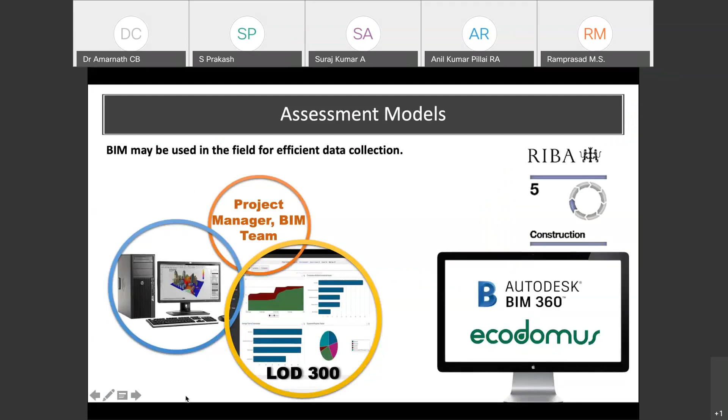The next is space planning for move management. In different infrastructure spaces, you may have different kinds of crowd behavior and different timelines. You need to know the required passages and travel paths for this crowd movement. So these simulations can also be done with BIM.

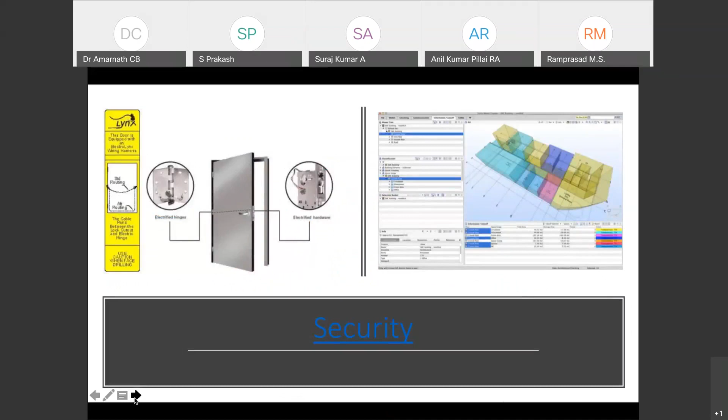The next is security. You may have different security cameras, alarm systems, but you want to know how much distance these cameras can cover, how much distance these alarms can cover in terms of sound penetration. So all these things can be simulated using the BIM model that will show this is the area this camera can cover. All these kinds of security checks can be done with BIM.

The next is CMMS and CAFM data model integrations for better facility management. The next one is resiliency modeling, for any kind of disasters - how do you quickly recover in that situation? Visualization simulations can be used to support land use policies and help analyze first response data and access, to determine the final strategy.

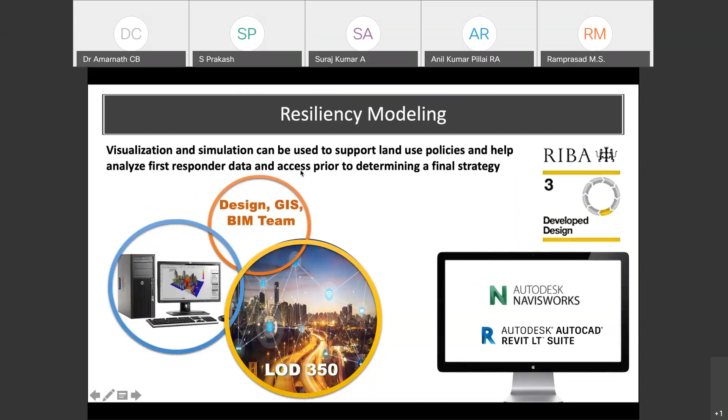Next is building automation systems integration, or you can call it infrastructure automation systems, or smart city, or whatever it is. So once you have the digital model of the facility, you can link it with your surveillance camera data, security access data, fire detection and alarm systems. All this, whatever you see in smart facility management, all data can be linked back to the model so that you can do better smart management of the facilities.

You can just have access to the model on one platform, on your iPad or a mobile phone, and you can still capture and monitor the project, your facilities.

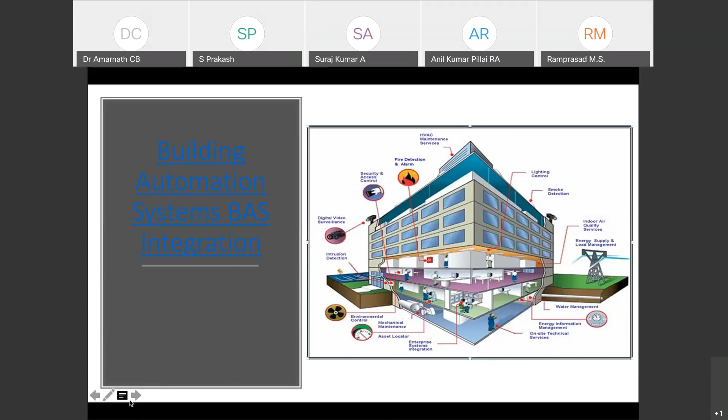Some software vendors focus on design related software, some focus on construction and operation related, some focus on building sector software, some focus on cities and infrastructure related. It's very much important to understand the connectivity between these softwares and projects, and also the costing and readily available people to work on that software.

And what is the future of BIM, and how can BIM education be delivered? Forget about the global sector - they focus on that, but this is our country, we also need to go through the transformation. This is a country where you have the biggest market for industrialization, and the highest investments are happening at this point in time. We have a very young and youthful population who are ready to go and support, but directing these people is the most important thing. When they don't have proper direction, it will be very difficult for them to focus on the right things.

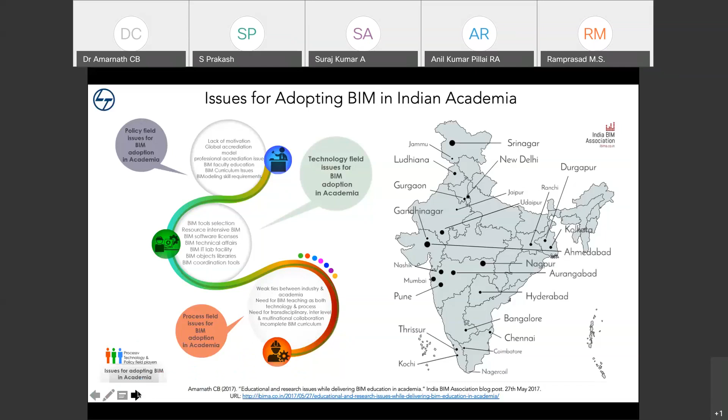Coming to BIM education, you cannot say BIM education is just one semester, one subject. BIM cannot become one elective subject in a course. Then it's like someone says BIM is not there in the curriculum, so you introduce one subject and say BIM is there in the curriculum. That will not help. You should introduce BIM in different existing courses itself, and it can also be a separate course for a master's degree.

Most universities nowadays globally have a master's degree only on BIM, or most divisions like architecture, civil, computer science have introduced BIM in their subjects. So it's very important to understand how the framework needs to be designed for a particular university.

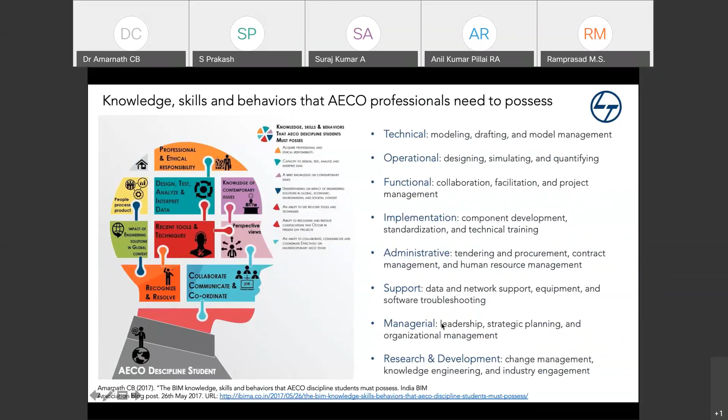In terms of skill sets also, someone knows one software and thinks they know BIM, but everything. People have different skills and competencies to focus on BIM projects. Someone may be stronger on technical, someone operational, functional implementation, some good in administrative, support, managerial, R&D. The combination of this works for different job roles in the market.

I'm bachelor's from civil. My hometown is Bangalore. I've done a master diploma in CAD, that's where I started BIM. That was 2005, by now 15 years. And master of engineering in construction management, and then a master's degree on global BIM management from University of Barcelona.

And my PhD is on how BIM can be strategized at the organization level, from National Taiwan University and Imperial College London as an exchange.

Then we started a society, the India BIM Association, still running with a good swing with better collaboration with almost 60 countries. Currently I'm serving as head of BIM strategy for L&T construction, where my role is to formulate L&T construction's way forward in terms of digital transformation for the next 5 years plan. We also have a BIM academy set up in the company where we do day-in, day-out trainings for our technical level, manager level, senior executives. I take care of that part, and also get the company ISO certified.

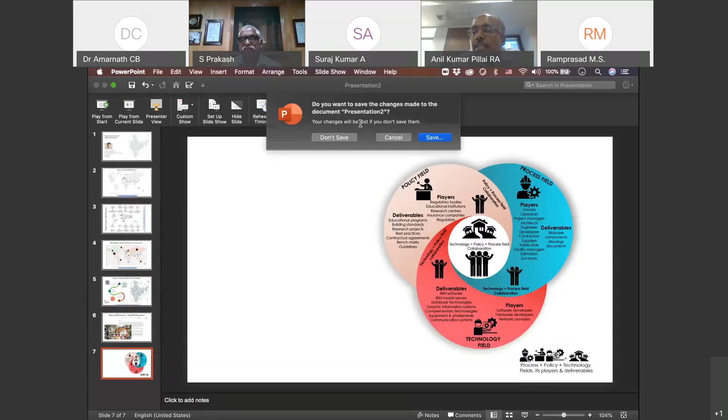Thank you, sir. The first question is, can the process of linking the 3D model to the project schedule be automated? Currently, the 3D designer's model has to be split as per the task manually, and then tasks are linked to building objects in the 4D software such as Navisworks. This question is being asked by Rishabh Borade.

See, the way you develop the model, when you develop the BIM model, if you understand how the activity splitting happens, when you go to MSP or Primavera, you have activity breakdown structure, work breakdown structure, and all these things. If you can understand that, and based on that you develop the model, then there is no question of difficulty in linking the model with the time. But if the design team is not coordinating properly with the planning team, that's where the problem occurs. And again, it's BIM, nothing especially different, it's all about what you are developing. The way you develop, if it's standardized, then there is no problem in linking.

But currently, what I see is there's a little bit of difficulty in how you can break down the model for linking with the software, using softwares like Navisworks and so on. I do agree, but it should be standardized further.

The second question is, how is the 4D BIM model updated as the construction program progresses, so that it can be used to visualize the difference between the planned versus the built model? The updation of the 4D BIM model, how can it be done?

Okay, so as many of them know, you can use the BIM model to link with the timeline using some of the technology solutions, and you are also using it for progress monitoring. But your question is like, how can I use whatever the site data coming in for progress monitoring?